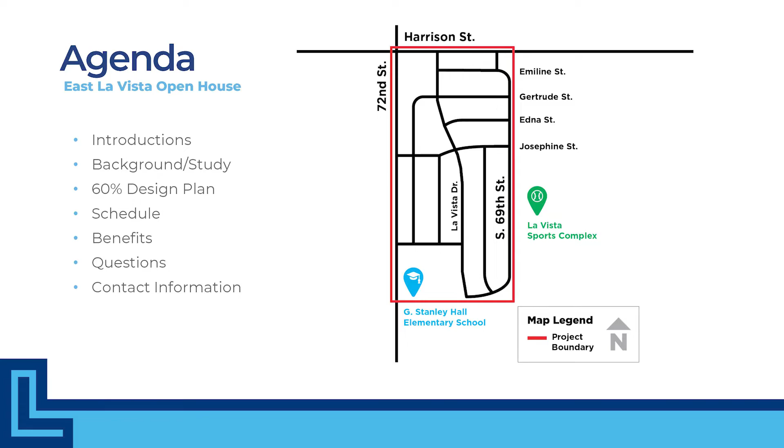Our agenda today includes introductions of who's going to be speaking, a bit of background, and we'll talk about the study we conducted in spring of 2019. We'll go over the 60% design plan, our proposed schedule, the benefits of the project, and some questions you may have.

We'll leave contact information for you to get a hold of us after this recording is over. We also plan to have another public meeting closer to the beginning of construction, which would happen in early 2022, and we'll be communicating with the public throughout the entire process.

I'd like to spend a couple seconds introducing the speakers for today. Jeff Calentine is our Deputy Director of Public Works with the City of La Vista, and Pat Dowse is our city engineer with the City of La Vista. They partnered with HGM Associates, a local engineering firm focused on transportation and roadways, as well as TREKK Design Group, a specialty engineering firm focused on subsurface reporting and data presentations. With them is Brock Beran, Associate Partner, and Fortino Ramirez, Project Engineer.

With that being said, I'd like to hand it off to Pat Dowse from the City of La Vista, to discuss the background and needs for this project.

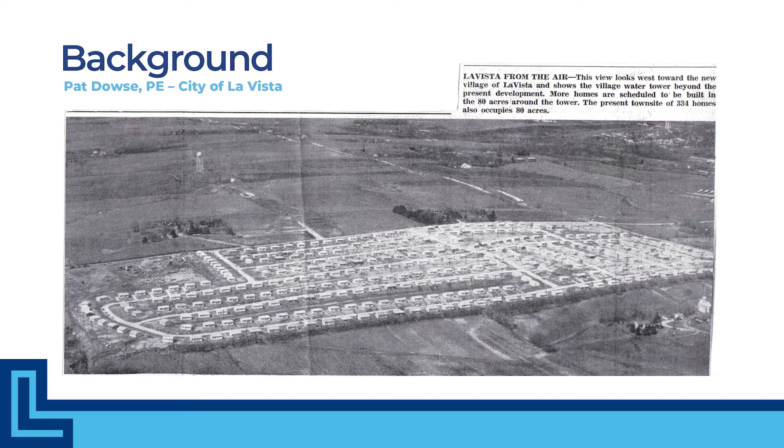Evening, my name is Pat Dowse with the City of La Vista, City Engineer. A little background on this project: the neighborhood was SID number 4, the original SID that became the City of La Vista. It's bordered on the north by Harrison Street and on the west by 72nd Street. To the east would be the sports complex, and to the south the elementary school. It's approximately a 67 acre parcel, constructed approximately 1959 to 1960.

The project has been on the radar for quite some time. The pavement condition has been rough. As we looked into it, we understood there may be some subsurface concerns as well, which was the intent behind getting the evaluations done in 2019, to understand what all may be part of the project.

The goals of the project were to evaluate the existing streets and sanitary sewers throughout the neighborhood, to extend the service life of both systems up to 50 years, to prepare final design specifications and plans, and to put those out to bid to a contractor to complete the project.

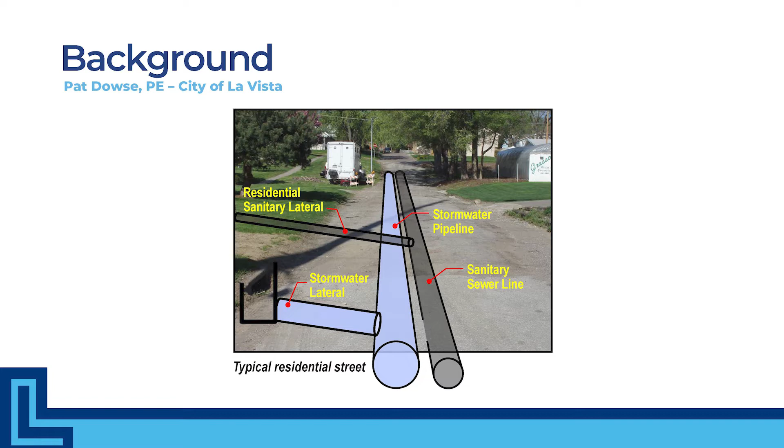With that, I will turn it over to Brock Beran with Trek Design. Thanks, Pat. Like it was mentioned, I'm Brock Beran with TREKK Design Group.

One of the first things we wanted to do is get out there and study the sewer system. In a situation like this, when you have a lot of issues with the pavement, that typically means you have I&I issues underground and into the sanitary system. So there were two major components to this.

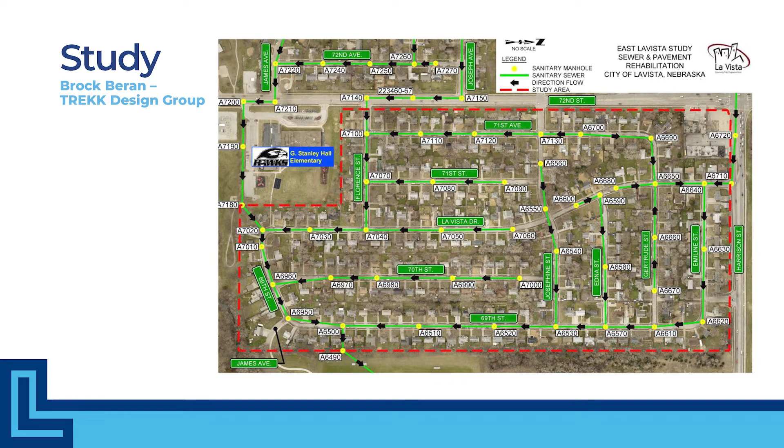When we got out there, the first thing was sending a 2-person crew to look at the manholes—basically manhole inspections, looking at the condition, seeing if anything was missing or if there were any major issues. The next part is called CCTV, closed circuit televising, where we send a robotic camera into the sewer system to videotape it and perform a condition analysis of the sewer. So that was done.

Pretty typical of this age of system and materials, there were a ton of root intrusions in the joints. One of the main things was there were roots entering through most every single lateral in the system. Other issues included offset joints, fracturing of pipe, cracking pipe, and broken pipe.

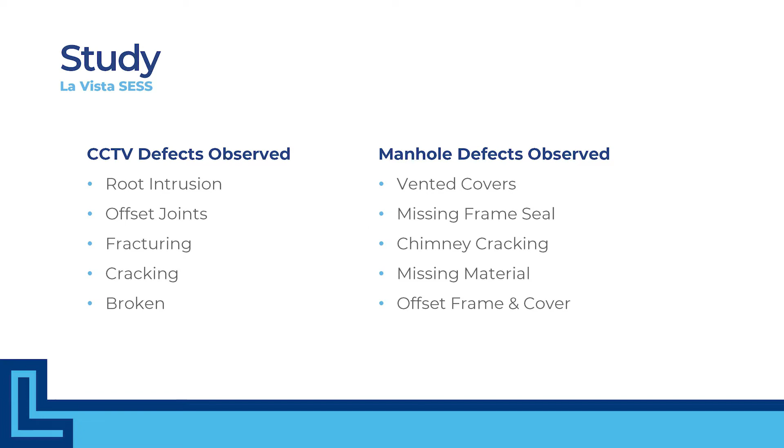With the manholes, vented covers - a lot of them had more venting holes than they should. Typically it should be solid in a sanitary system. There were also a lot of missing frame seals, chimney cracking, missing materials, and offset frames and covers. So just a couple examples of what we saw.

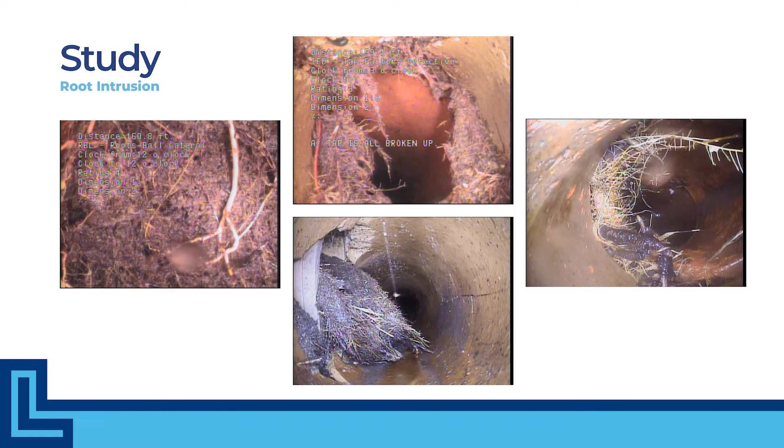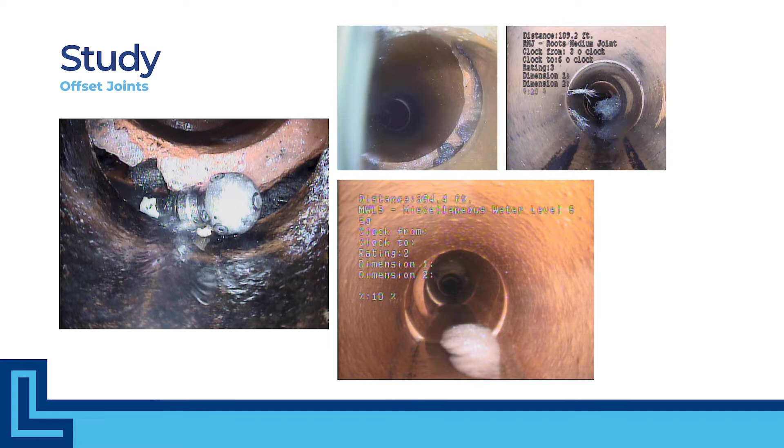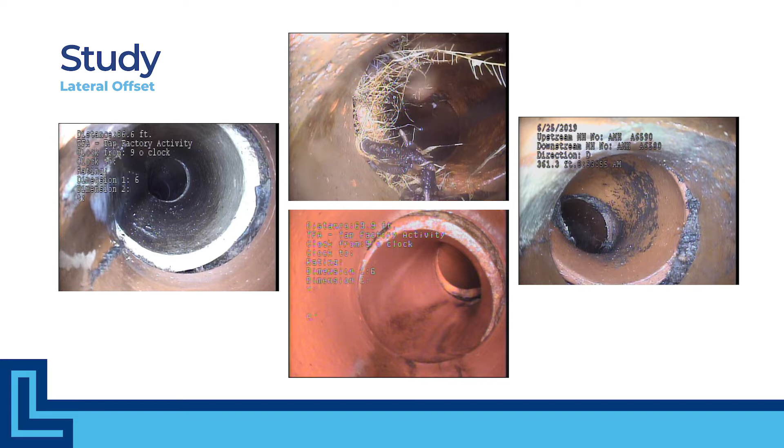Here are some lateral offsets, basically the same thing as the mainline offsets, but these are in the private laterals. So when we would travel down the main, we would look up the laterals to see, and you can see a lot of the offset joints there creating issues just on the outside of the public main.

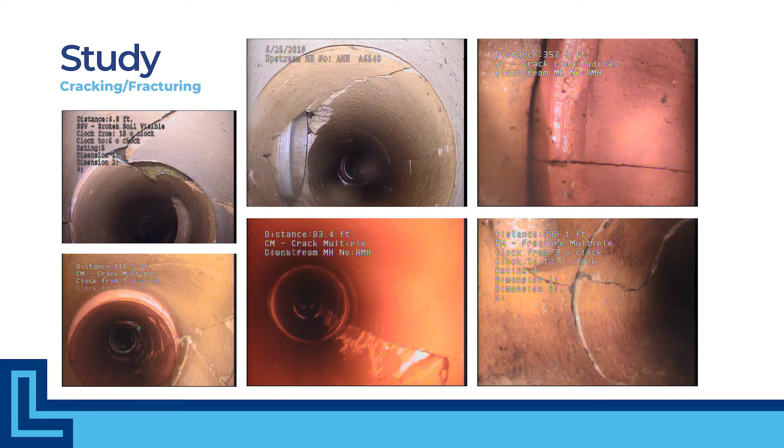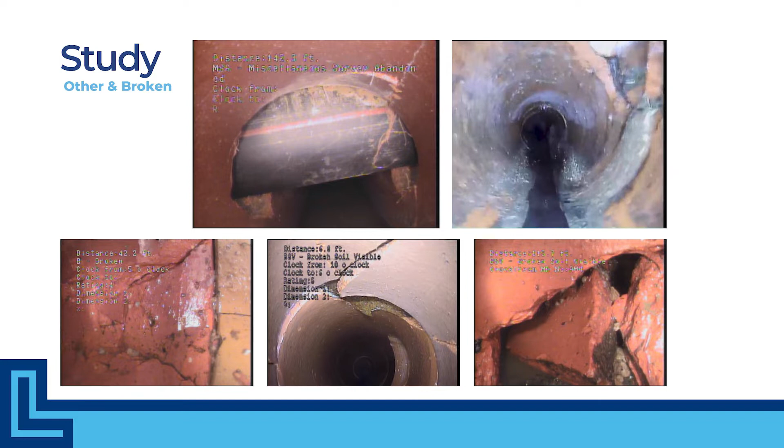Here's some more pictures of some broken pipe. The top left picture is actually another utility main that has been cross-bored through the main, so that's restricting the flow and causing some issues.

And then here are just some examples of the manhole defects that we found - a lot of material missing, missing frames, seals like that.

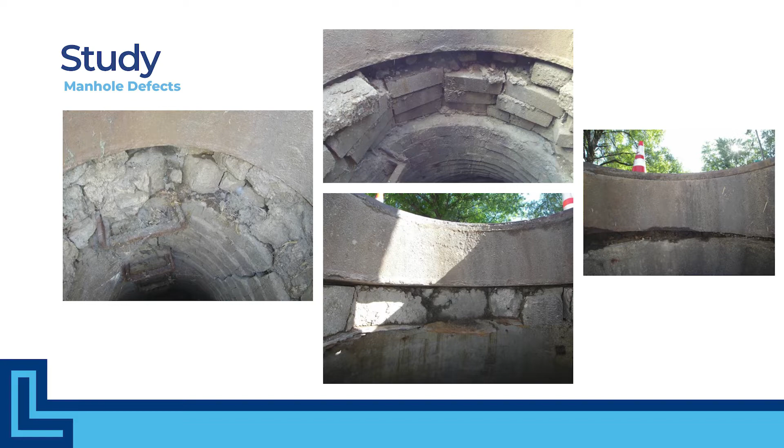After we got done looking at the sewer system, then it was on to the pavement analysis. So I'll pass it over to Bill to explain that a little bit.

Thanks, Brock. HGM did a pavement assessment throughout the area here, basically doing a visual inspection and using a pavement rating method. After inspecting those, we score them, and based upon that score, it rates the condition of the pavement. The map is color-coded with the pavement colors.

The orange and yellow are primarily roadways that are in fair condition. The red and purple are roadways that are in poor condition. So you can see about half the subdivision is fair condition, the other half is in poor condition.

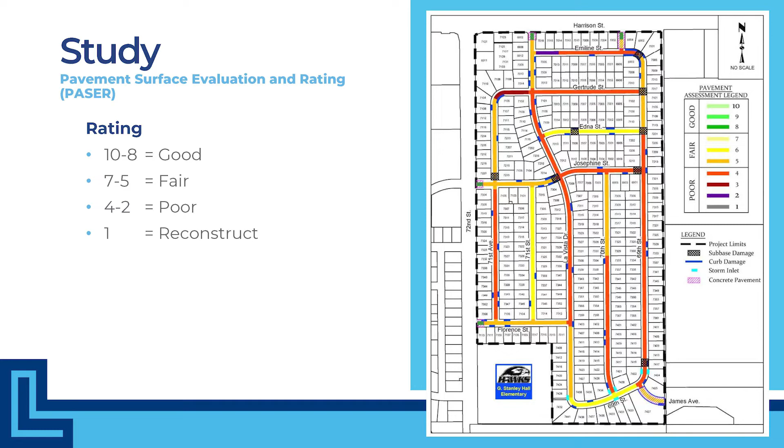Also, in addition to doing the visual inspection of the roads, we did coring of the existing pavement out there. The original pavement was Portland cement concrete pavement. As you can see here in the photos, we've got conditions where it's maybe 6 inches to 5 inches in some areas, and the current standard for actual pavement thickness is 7 inches.

Over the years it's been overlaid with an asphalt overlay, which is the blacker material there. It's been patched, and as you can see that varies - primarily most of the overlay is 2 inches through the area, but on that 69th Street photo there are some areas where it's less than an inch. Even total with the overlay and the concrete thickness, it's less than 6 inches on 69th Street, so that's kind of substandard there.

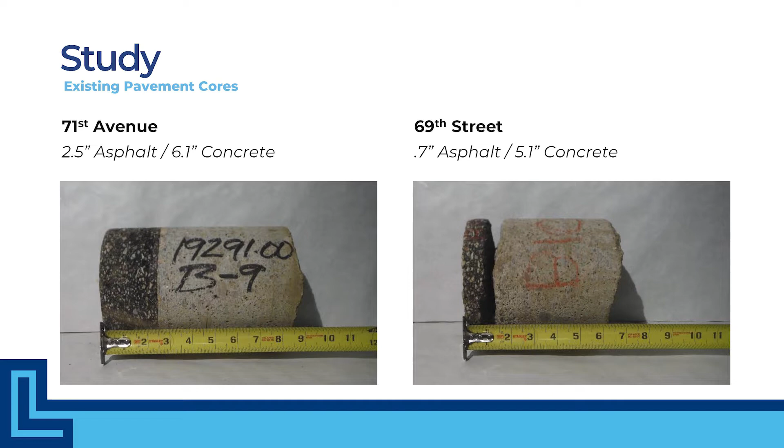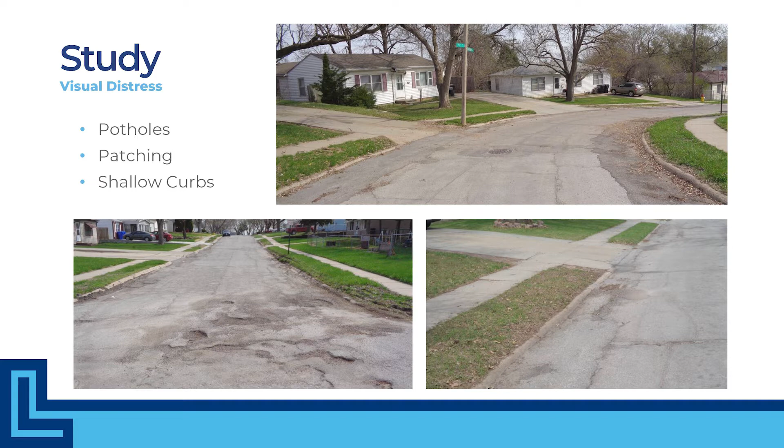Here are just some pictures of the neighborhood, and you're probably well aware of some of these things. There's issues with potholes - all this has been patched over the years. You can see a lot of patching along the gutter lines near the curbs where potholes were. By doing that too, we've also made the curbs kind of shallow with all the buildup of asphalt at those edges.

These are some more pictures showing some of the other conditions we're looking for in our pavement assessment. Longitudinal and transverse cracking basically occur with cracks in the pavement down below that get reflected up, either at joints or cracks in there. Those are generally about maybe 10 to 12 feet in spacing.

Then we'll start getting some block cracking as the pavement ages, and this is generally conditions where the cracking is maybe in the 5-6 foot range spacing.

And then we get down to alligator cracking, where you get spacing between the cracks of about a foot, 6 to 8 inches or so. That's kind of demonstrated by that bottom left-hand photo there. This usually occurs too, obviously, as the asphalt's getting very old, and also if there's issues with the concrete pavement down below.

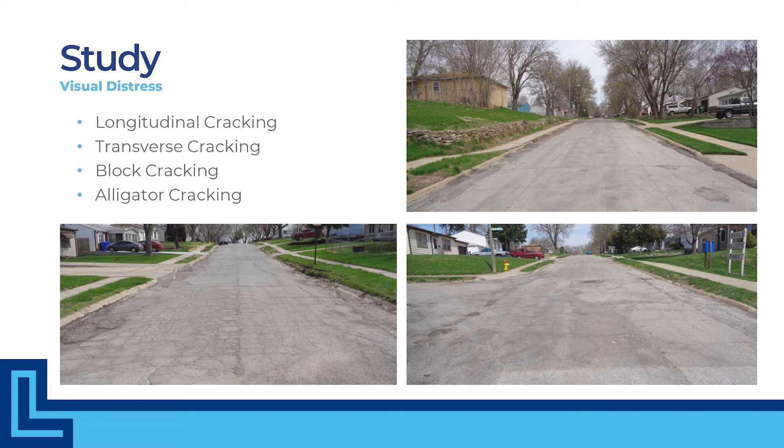Then while we're out there looking, there's some other issues associated with the pavement. Some of it's the curb inlets. A lot of the curb inlet tops have some deterioration or cracks in them. We intend to address that during this project.

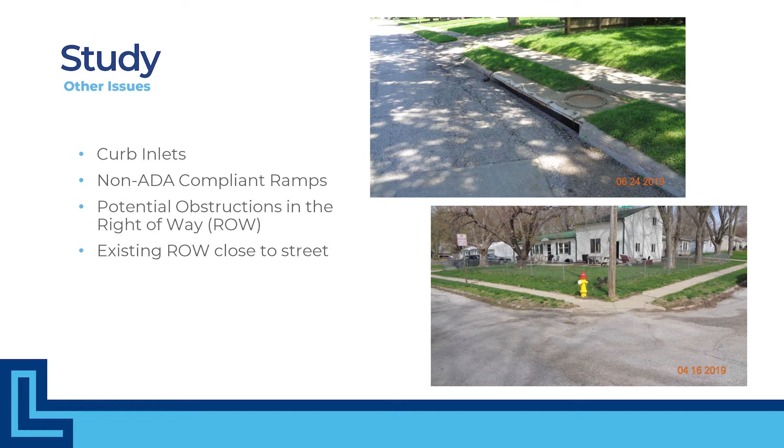Also, all the curb ramps in the area are non-compliant to current ADA standards, so we'll be addressing some of the issues we might have with fixing the ADA ramps. We've got some light poles and fire hydrants and stuff, a lot of things that are in those corners there.

So next, after going through and doing all those assessments out there, we went ahead and developed 60% plans. And so with that, I'll first turn that over to Fortino to discuss some of the sanitary sewer issues.

Hello, my name is Fortino Ramirez. I'm a civil engineer with TREKK Design Group. I am leading the design efforts for the sanitary sewer repairs.

Overall, the sanitary sewer repairs are broken down into 3 main items: lateral repairs, mainline repairs, which sub-break down into lining and point repairs, and lastly, manhole repairs.

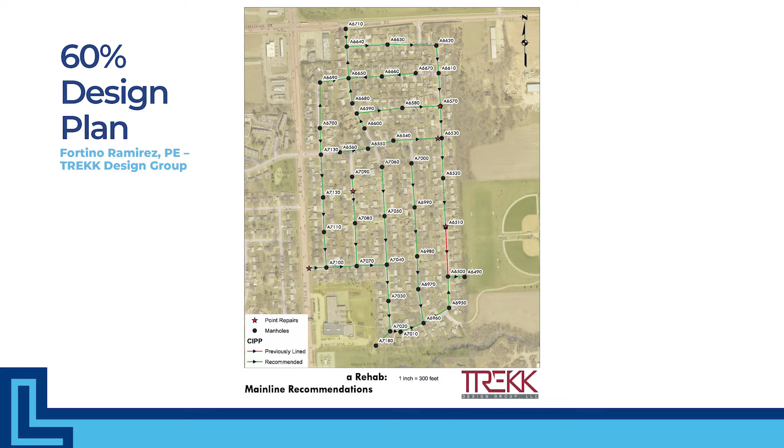Lateral repairs involve repairing and really exchanging the lateral from the main line to the back of curb. We wanted to keep all improvements to the public street.

The laterals are made out of VCP, which is vitrified clay pipe. Back in the 50s when they were installed, the joints would tend to offset and there was not a nice clean seal. So with time, roots find their way through there and end up cracking that brittle pipe. The idea here is to replace those VCP pipes with plastic, PVC, which have a chemical weld between them and prevents any type of intrusion of water or roots.

Point repairs to the main involve getting down to that main and repairing those pipes that we previously saw in other pictures that were broken, or where you really couldn't get a camera or anything in there. So we'll be excavating down to replace that pipe, so we can have a nice continuous flow and be able to get cameras and our liner in there.

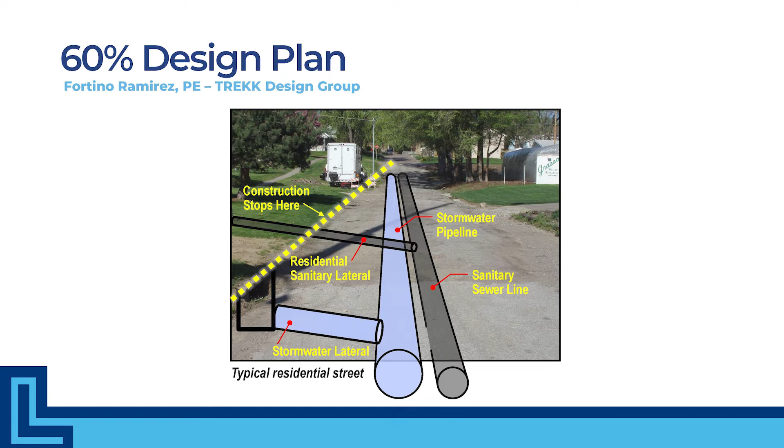The liner will really involve cleaning the main line, getting all that gunk and roots out, and coming back in with what they call a cured-in-place pipe, which is an epoxy resin with fabric that gets inflated inside the pipe. Once it's cured, together with the existing pipe, it rehabs the pipe to the full extent of the life that it's supposed to have.

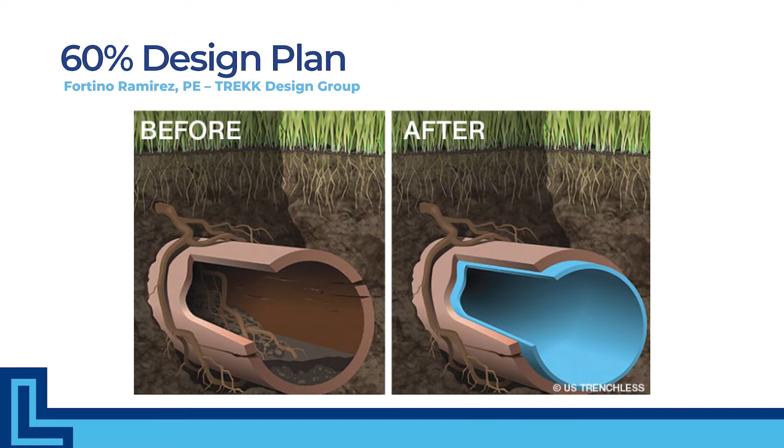Next up, we have manhole repairs, which will be giving them a cementitious lining, and also repairing some of the holes and bricks that were missing. So that covers really what's going to happen for sewer rehab.

I did want to point out some items that you should expect during these rehabs. For lateral repairs, expect to be asked to stop usage of any water or any drain in your home for approximately a day. This will happen at 2 moments: when they do the lateral repairs, that'll be one instance, and also when they come back and do the CIPP liner.

When they're doing point repairs, you're not necessarily going to be asked to prevent any flow. The contractor has means to stop flow at manholes and bypass to others in the system, but you will expect to see some traffic or lane closure.

Manhole repairs, same thing. It's not intrusive to your usage of water and drains. It will most likely be just closure of streets and intersections.

CIPP lining, this one as well, you will be asked when the moment comes to prevent any flushing or uses of water from your home. During the process, they'll line the pipe, and then they'll come back and use a drill to cut out each lateral in the main. When that's happening, it will sound like sirens are going off in the neighborhood. So just be aware that it's not an emergency or anything - it's really just a contractor out there doing his job.

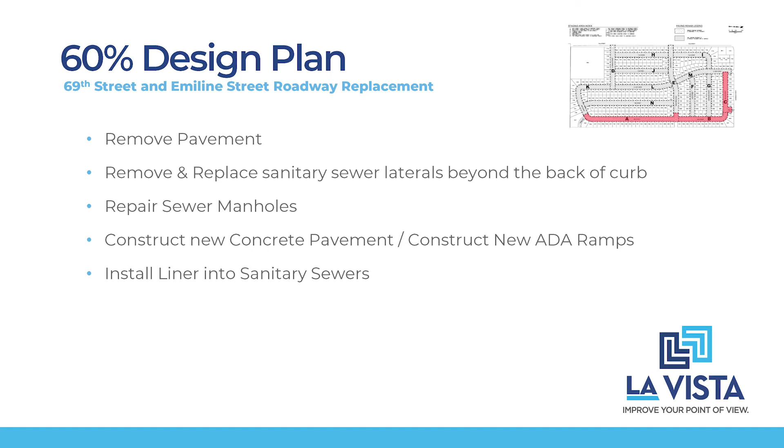So there'll be some of that work going on, limited in scope to try and reduce the amount of time you're not able to get into your driveway. One of the things that'll be done within these sub areas is they'll only do maybe 4 to 6 homes a day, only as many laterals as they can completely open the trench for, put in the lateral, and complete that, progressing through there. They're not going to tear up the whole area A, B, or C at the same time; they'll work their way up through those areas.

They'll use temporary rock to fill in areas where pavement's been removed but not replaced, to allow traffic through. So hopefully after the laterals have been done during the day, you'll still get access to your driveways. Now, when they actually pour concrete for the driveways, that'll affect a longer period of time. You won't be able to get in on the day of pouring, and then the concrete has to cure, so you'll be out of your driveway a bit longer. But ultimately, we'll try to keep traffic open and keep disruptions to a minimum.

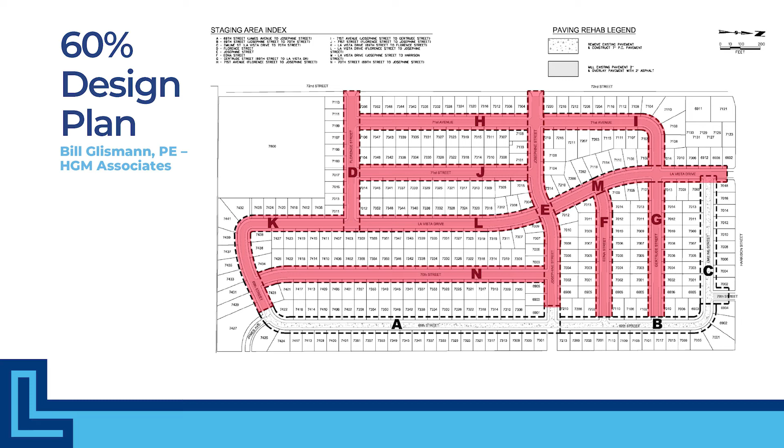In this area, the construction sequence will be a little similar, but basically we're going to remove pavement at the sewer laterals. Then they'll come in, replace the sewer laterals beyond the back of curb, and come back and replace that pavement where the sewer laterals are.

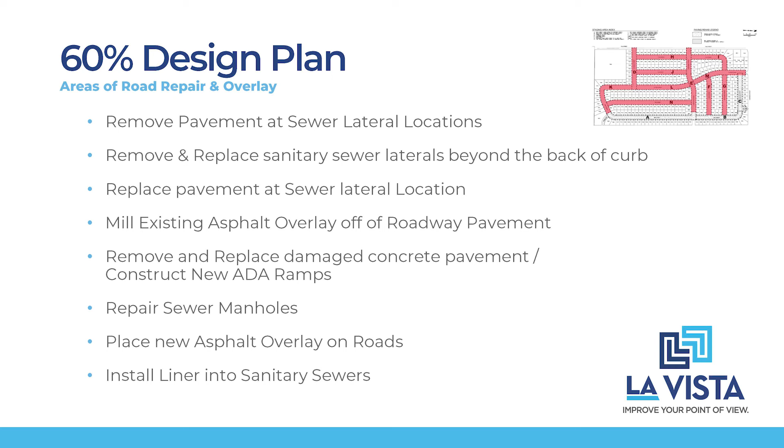After that's done within the area, they'll come through, mill all the asphalt out, and look at any other repairs needed to the concrete. They'll work on the ADA curb ramps, repair any sewer manholes at that time, and once all that's done and the pavement's repaired, they'll come back and do an asphalt overlay over the whole area. Ultimately, the last thing done will be installing liners in the sanitary sewer at the end of the project. And with that, I'll turn it back over to Jeff to discuss the schedule.

Good evening, La Vista. Jeff Calentine with your La Vista Public Works Department. I'm here to talk a little bit about the timeline, some history, and some scheduling.

Those of you who've followed our CIP know this project has been identified as needing work for quite some time. The issue was that we didn't have a good funding source identified, and we've been working towards that for a long time. We redid our sanitary sewer rate study, which allowed us some reserve funds for this project. We also had the opportunity to participate in the state revolving fund and apply for a 30-year loan that really got this project on firm footing.

Back in 2019, as Pat alluded to, we did some evaluation and additional funding research to identify the scope of this project. We're currently in the heavy phase of design, working towards final design. We just finished up 60% plans, and towards the end of the year we'll get those finalized and work towards bidding documents, with bidding to contractors probably in January or early February.

As far as construction goes, we'd like to start in 2022, and our hope is to complete it in 2022. As everyone knows, with material and labor shortages, that could impact those timelines. We'll keep everyone updated as we work through the process, but we could anticipate some paving having to take place in early 2023.